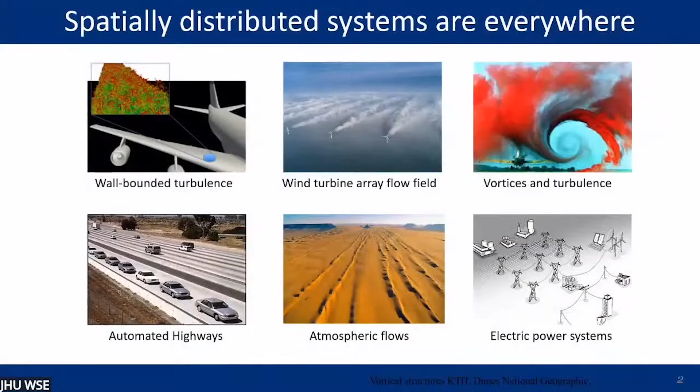You see it in electric power systems, automated highways, and you see it in terms of what patterns you see from atmospheric flows. And so systems that evolve over space and time, or these spatially distributed systems, are inherently complex, for a lot of different reasons.

But one of those reasons is they're often high dimensional. Because say you need a PDE representation, meaning you need math that goes in space and also goes in time. So you get a complicated dimensional system.

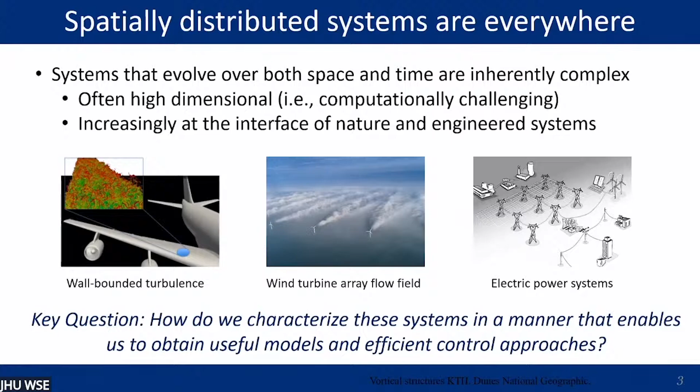And they increasingly happen at the interface of nature and engineered systems, where you have to deal with different uncertainties that are coming both from nature and from things that we're trying to deal with and control, such as wind farms. So the question is, how do we characterize these systems in a manner that enables us to obtain useful models of these systems, models that let us reason about what's happening, and also efficient control approaches?

So the goal of my lab is to really understand, characterize, and control these complex systems by exploiting structure. And that structure might be physics, it might be some of the spatial interconnections in these systems. I want to do that so I can develop reduced order models that isolate critical system properties, allowing me to reason about more complicated systems by looking at simple interactions. And I want to leverage this new understanding to design performance-enhancing control strategies or operational strategies.

And so I've worked on a lot of different systems. From John's introduction, it's all his fault that I work on all of these different things and that I want to work on all these different systems. So I come by it honestly. From wall-bounded turbulence that you see here, all the way to electric power grids.

But today I'm just going to focus on three problems. I'm going to talk about some of our key contributions in flows transitioning to turbulence, also in wall-bounded turbulence, fully developed turbulence, as well as in control of wind farms.

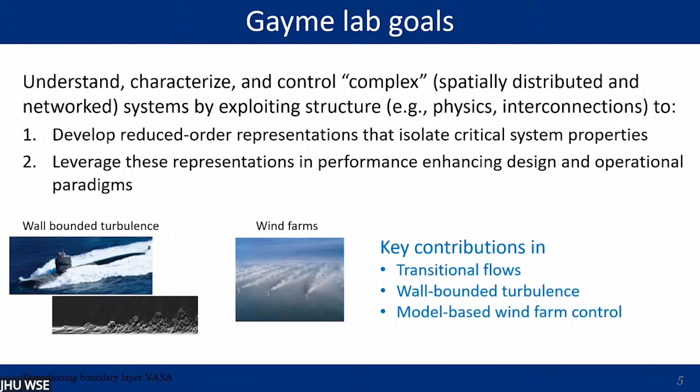And so I want to start, because many of the audience are not from a fluids community, with just flow over surfaces. So if you think about flow over surfaces, like over an aircraft wing, you have this airfoil, and you generally want this flow to be streamlined and laminar. That reduces form drag, which is why cars are designed in ways that look very streamlined. So you reduce form drag, and you can see that. This is flow over a boundary layer, and you can see this nice streamlined laminar flow here in this region.

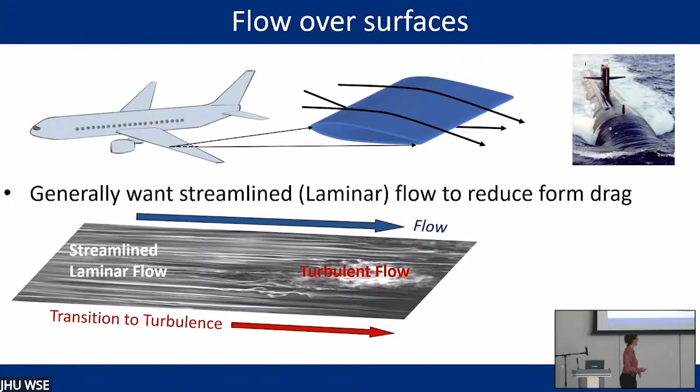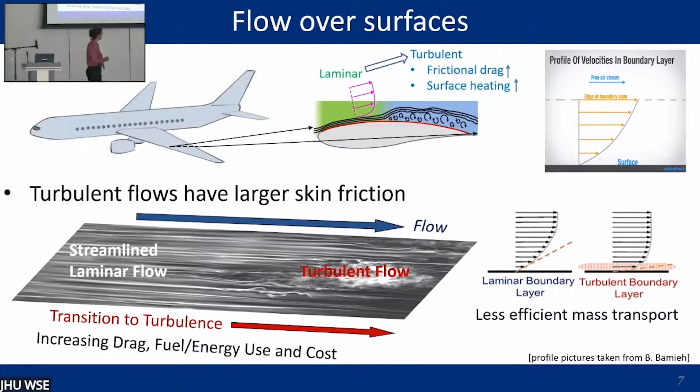But as it transitions to turbulence, you get a lot more mixing of this flow. It doesn't look so streamlined and laminar anymore. And what does that mean? It actually means that your flow is mixing up quite a bit, and it's interacting with the surface more. That's not good in terms of mass transport or efficiency of mass transport across this. So you get less efficient mass transport, and more skin friction drag, and you can get more surface heating.

So just to make this a little bit more concrete, let's look at an example. And so this is what we call a canonical flow.

So these are prototype flow problems that we look at and reason about so that we can understand more complicated systems. Think of flow between two infinite parallel plates, driven by the motion of the top plate - it's a shear-driven flow because you get a shear developing here. In a laminar system, you get this nice organized flow, and this is the shear that you get.

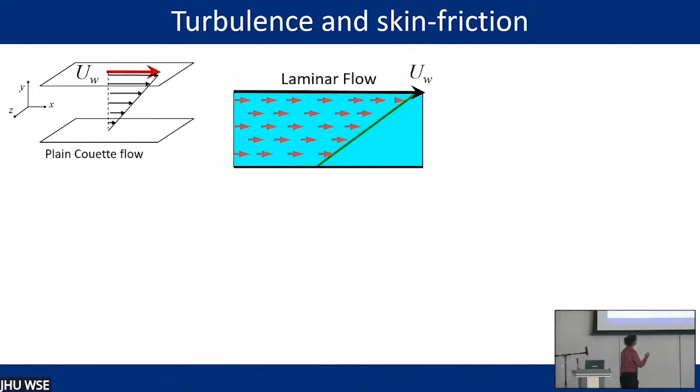In a turbulent flow, everything's mixed up quite a bit, and so the velocity profile that's coming out of this looks very different.

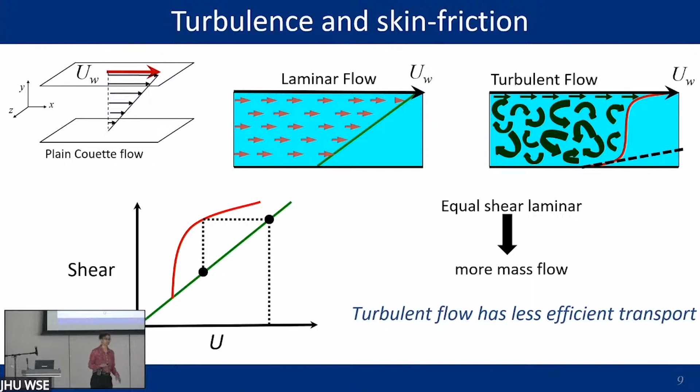If you look at the shear in the turbulent flow versus the laminar flow, for the same shear on both curves, you're going to get a much higher velocity in the laminar flow. This is what I mean by more efficient transport, because for the same amount of forcing, you're going to get much less velocity in a turbulent flow. So you have less efficient transport.

If we want to prevent this from happening, because we want more efficient transport in many applications, what we want to do is design some sort of control or model of what's happening in order to design strategies to mitigate this. So we want some sort of plant model. I'm a control theorist at heart, so I like block diagrams - I want this plant model that I can use to design a controller.

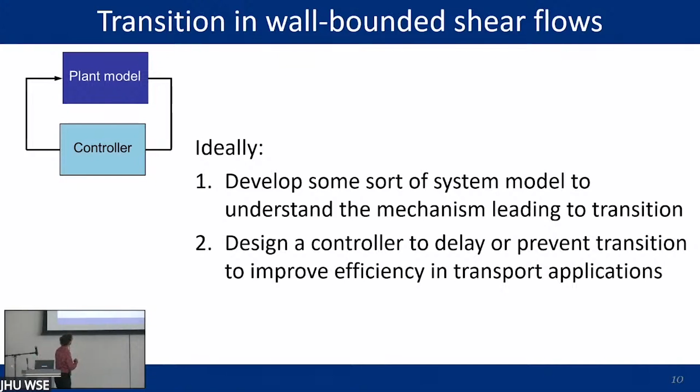But unfortunately, turbulence is really, really complicated. John doesn't think so, but in general, most people think turbulence is really, really complicated.

Okay, fair enough. So, oh, this is very interesting. Wow, this is going to be very interesting. There's not that much math in the talk, so we'll see how this goes.

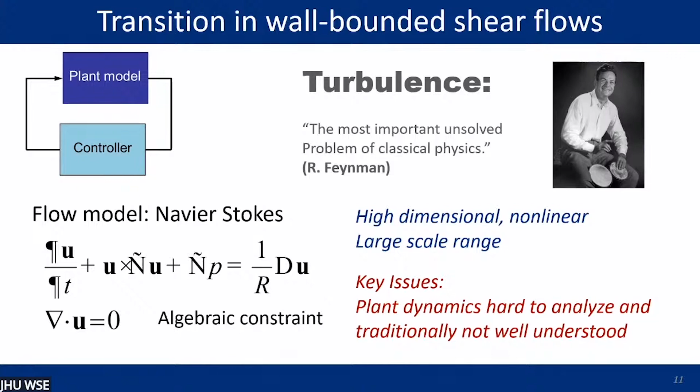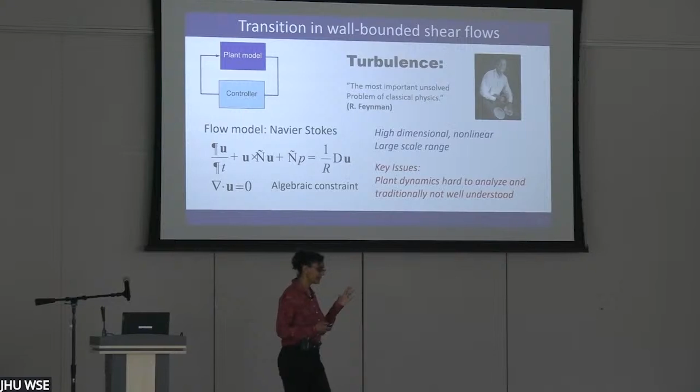So we have a flow model, but it's the Navier-Stokes equations, and these models are high dimensional. There's a large range of scales - very small scales close to the surfaces, and very large scales. This makes it very high dimensional, and very difficult to simulate or even do experiments. So these plant dynamics in my control block diagram are kind of hard to analyze.

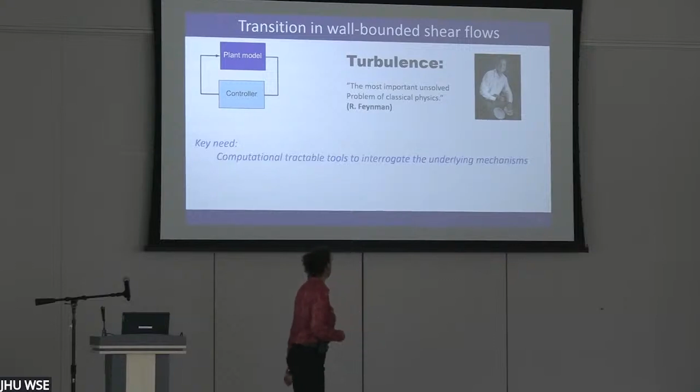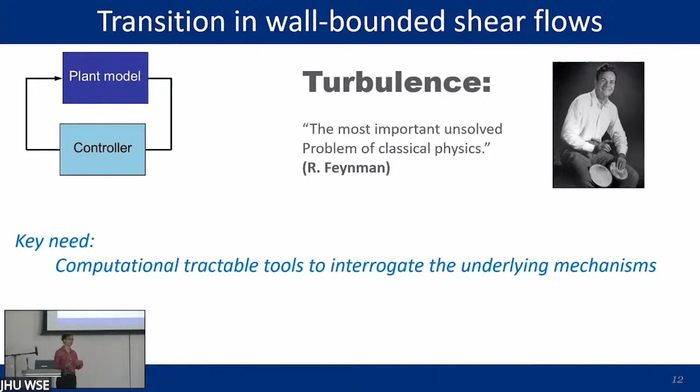And not traditionally super well understood in the context of designing flow control. So there's a key need to develop computationally tractable tools to interrogate what's happening there, in order to think about developing new models and new ways to control these types of systems.

That leads me to the first part of our contributions, which is really in transitional flows - flows as they're moving into the turbulent regime. What we've done is try to improve the fidelity of some tools for efficient analysis, using these tools to understand what types of actuation may be beneficial in delaying turbulence and transition. There's been a lot of work in this area.

One of my colleagues, Tamer Zaki, is an expert in this area, and this is actually a simulation of his. You can see this transition - we've had a lot of great progress from these simulations in understanding transition and turbulent flows.

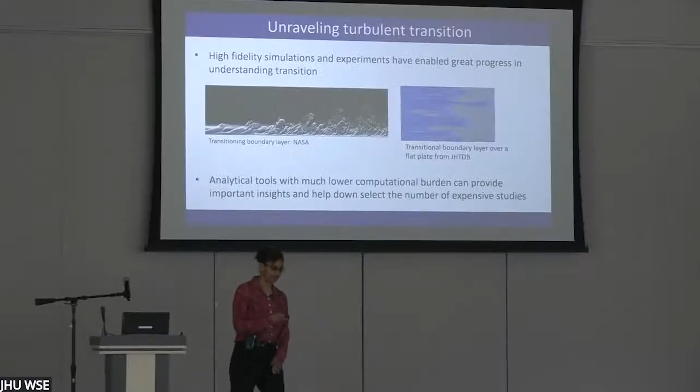But it's really expensive to do these types of experiments. So this is an experimental transition to turbulence where you can see, again, ordered behavior turns into very disordered looking behavior as you move along.

So what we want to do is design tools that have a much lower computational burden or are much more analytically tractable, so that we can reduce the number of these very expensive studies like simulations and experiments, and really understand which regimes we want to study.

One thing that's proven very beneficial in this regime is just linearizing things. If you don't want to think about this in mathematical terms, it means throwing away all the difficult terms in the equation - we can just think of nonlinear terms as difficult terms, so we can get rid of those.

It turns out that if you just think about this in terms of disturbances to the flow - which could be the things we threw away - this linearized model gives resulting velocity fields that look really similar to reality. There's been a lot of progress here. This is looking at what's called an impulse response, where you hit the flow really hard to see what happens.

And so what you see is, what you get from these linearized models is something that looks like this, which looks very much like a turbulent spot that you see in the field. You also get these high and low speed fluid streaks, which is what you're also seeing in these transitional regimes.

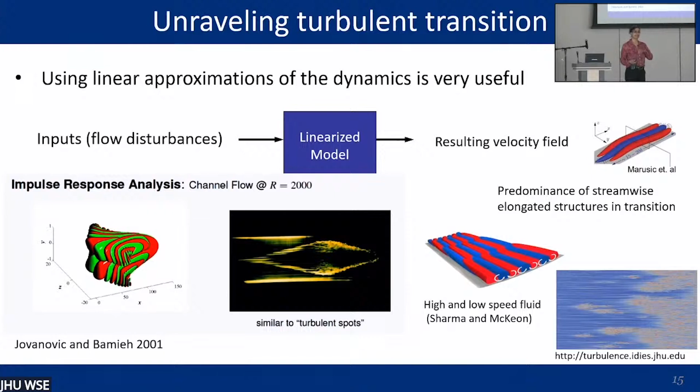So this gives you a lot of information about what's important and what types of disturbances are likely to make your flow transition. So the key insight that we had in my group, really from my student Chang Liu, is that we can do better than just a linear approximation by imposing some structure on this nonlinearity, including it in the model without greatly adding to the computational burden.

So what we actually did is we took this nonlinearity that looks like this, and we approximated it using a static gain operator. We keep the structure here of this nonlinearity, so we just have the same input-output mapping. This direction only goes to U, this direction only goes to V and W. And so we use this as an input-output gain idea.

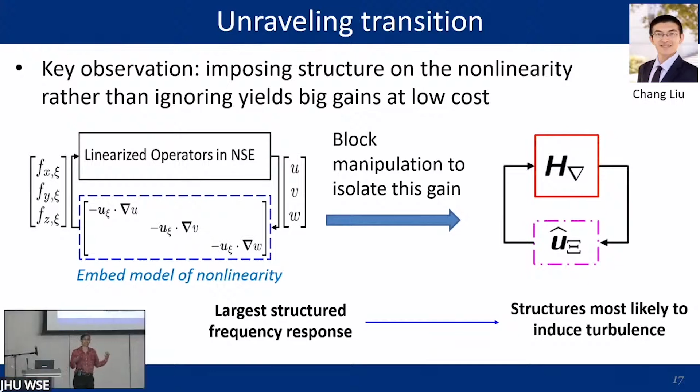And so then we can take this nonlinear operator, do some manipulations of this block, and put it in what looks very much like a robust control formulation. Then we can solve for this static gain as the disturbance that is most amplified here, so the structured singular value, if you will. The largest structured frequency response of this interconnected system gives us the structures that are most likely to induce transition or turbulence.

And so where we've applied this is really trying to understand the disturbances that the flow is most sensitive to. This is useful, say, if you want to design an experiment and you're trying to trigger transition in your experiment, you want the transition to happen as fast as possible. You can reduce your experimental size. Even in a simulation, you want to be able to trigger transition in the most efficient way, so this might be something that you want to do.

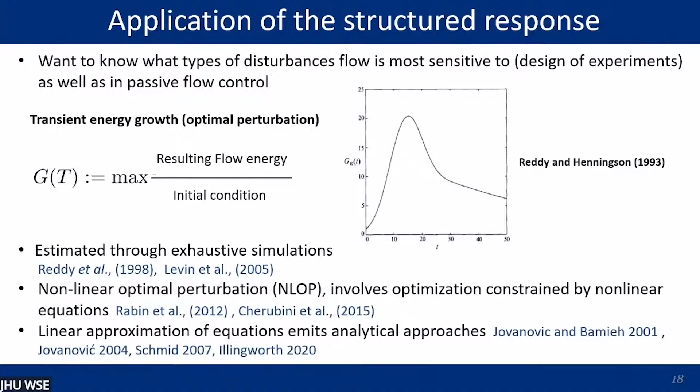And so what you want to do then is figure out what initial conditions are going to cause the greatest energy in your flow, right? So this is kind of an input-output response. You can do this in a lot of ways. People have done exhaustive simulations where they put in all sorts of initial conditions and keep testing and testing to see which ones the flow is most sensitive to. As you can imagine, that's quite expensive.

You can do optimization with the nonlinear equations, and it turns out you can use the linear equations to do this. This allows us to do things with input-output gains or norms, input-output norms. So you can use analytical approaches with the linear equations.

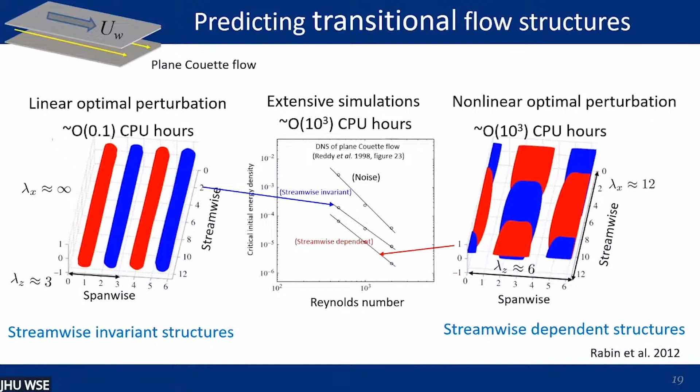But the problem is with the linear equations—again, we're going to look at this plane Couette flow example I talked about before. With the linear equations, you can do this really fast, almost 0 CPU hours. You can do this on your laptop really easily. You get structures that look like this. So this is span-wise and this is stream-wise, with stream-wise going in this direction.

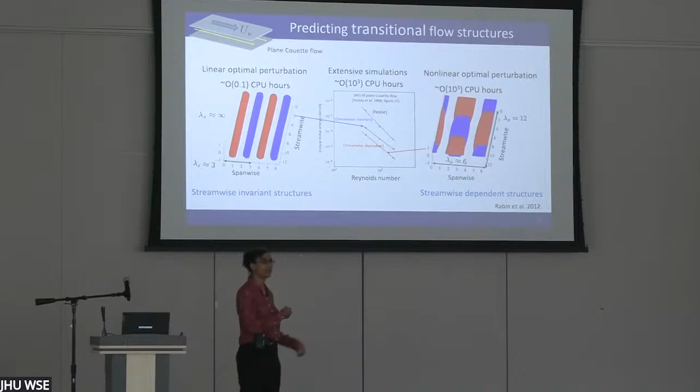So these structures look like this, right? These are long roll-like structures. But it turns out if you actually do exhaustive simulations or look at a nonlinear optimization problem, the structures look slightly different. They are shorter—these are infinitely long in extent, but these are more like oblique waves, and they're fatter.

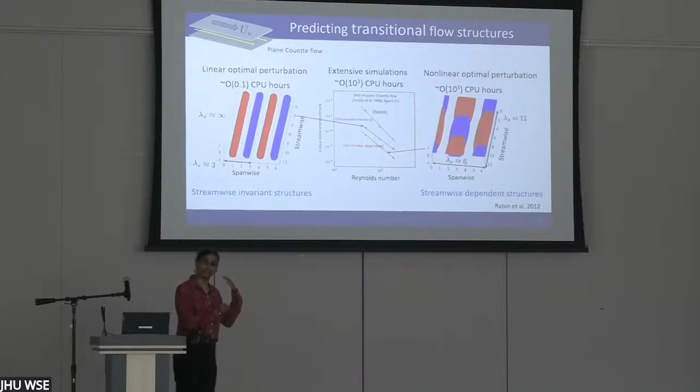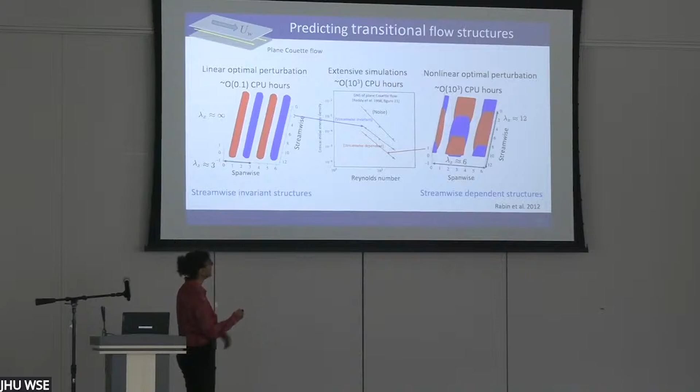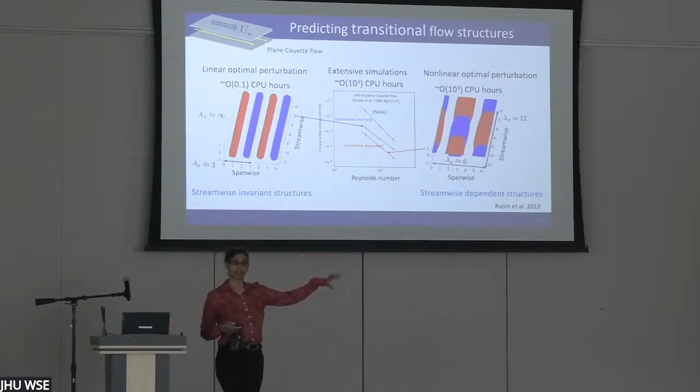And so if you do exhaustive simulations, they present this data in a slightly different way. But what you're looking at here are the structures that require the least energy density to transition—meaning the ones at the bottom are the ones the flow is most sensitive to. So these streamwise dependent structures correspond to the same things you get from this nonlinear optimization, whereas these streamwise invariant structures, these infinitely long structures, require a little bit more energy. So what we're seeing is these nonlinear approaches give us different answers than our linear approaches, even though we get the insight from it.

And so you can look at it again through looking at this exhaustive DNS, and you can see again we're getting the correct ordering of the structures, where the white noise also can trigger transition, but with more energy.

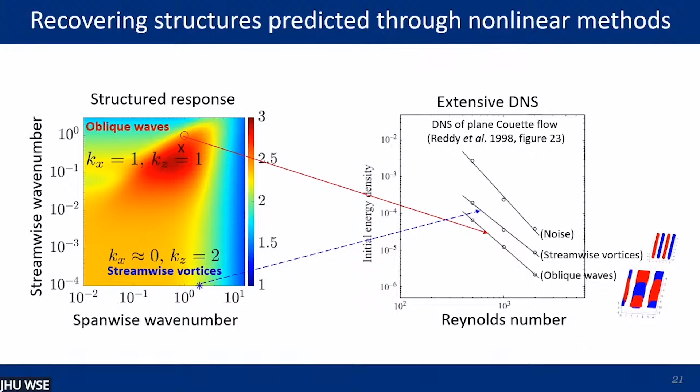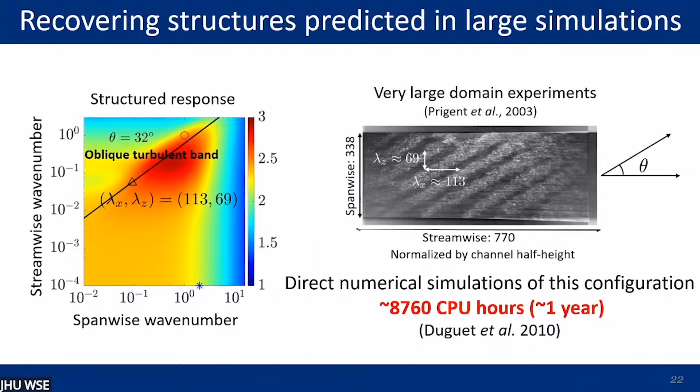The other thing that's nice about this type of approach is we also can reproduce the structures you see in transitional flows and structures you can only see if you use really, really big channels. So this channel is 338 by 770 times the height of the channel. So when I said infinitely long plates, those are really, really long plates, right? So you need to do a simulation this big.

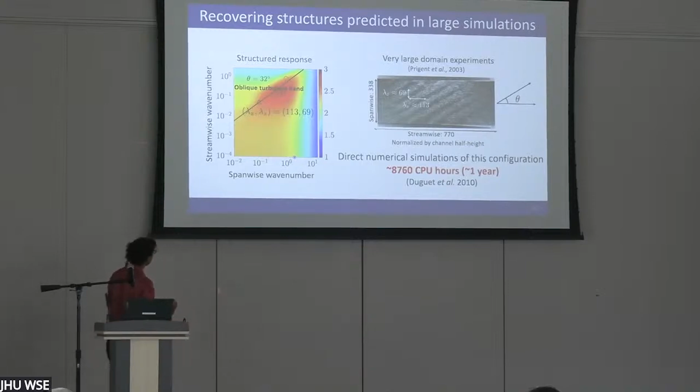So apparently that would take about one year to do a DNS, a direct numerical simulation of a channel. And we can do this in probably about an hour on a laptop. And we can identify the angle of these structures that they see in the flow here. So we're reproducing some of the structural features as well.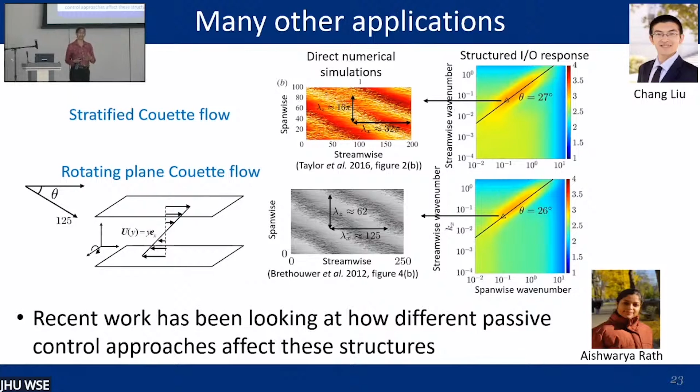And we're sort of moving into thinking about this for more realistic flows like boundary layers, and looking at the effect of different actuation in boundary layers.

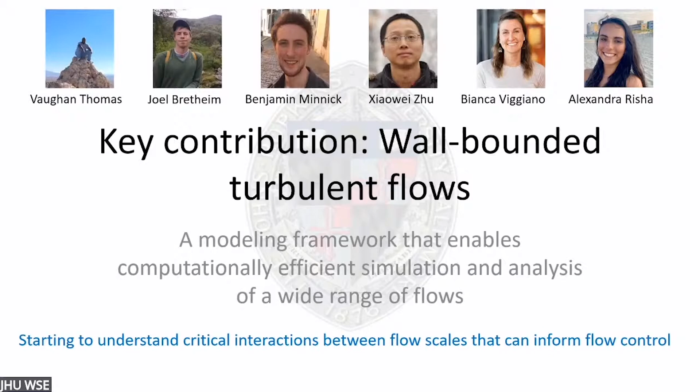So I'm going to move on to the next contribution, which is in fully developed flows. Now we've gotten to the regime where we're completely disordered, in this turbulent regime. Here our real contribution has been, again, a modeling framework that enables computationally efficient simulation and analysis of a wide range of flows. And in this work, we're really trying to understand some of the critical interactions between different flow scales that we can use to inform different flow control strategies.

So again, I like to use the simplification. I use the linearity to simplify the structure of the problem through the structure of the nonlinearity in the transition problem. But here we're actually just looking at the flow field and trying to look at structures that people see are ubiquitous in the flow field.

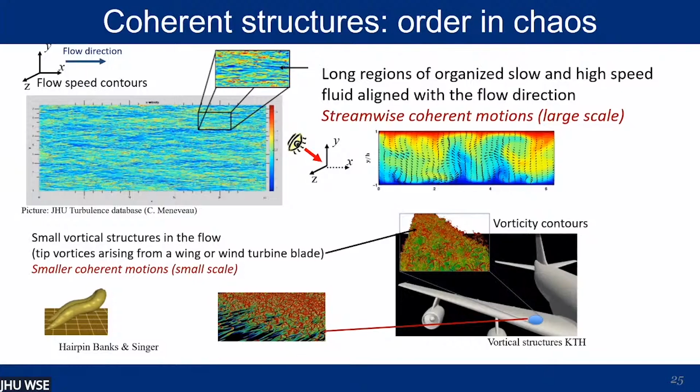And so it turns out, this is a picture from the Johns Hopkins Turbulence Database. You can see it's very clear there are these sort of long, streaky structures like I was talking about before in that flow. So if you look head on to this flow, this is the streamwise direction. So if you look this way, these structures look like this, and you can see these vortical structures here.

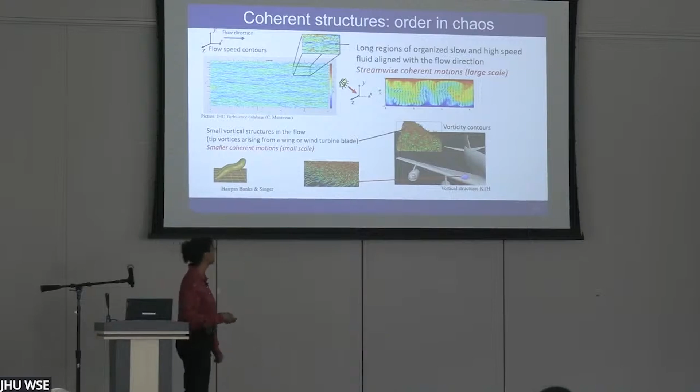You have smaller coherent structures in the flow, like these hairpin vortices, which you actually also see on these aircraft wings, where we're just highlighting the contours of vorticity. So you see there's a lot of these coherent motions. And there's been a long history of coherent structures in wall turbulence, trying to understand these coherent structures and building mechanistic models with them.

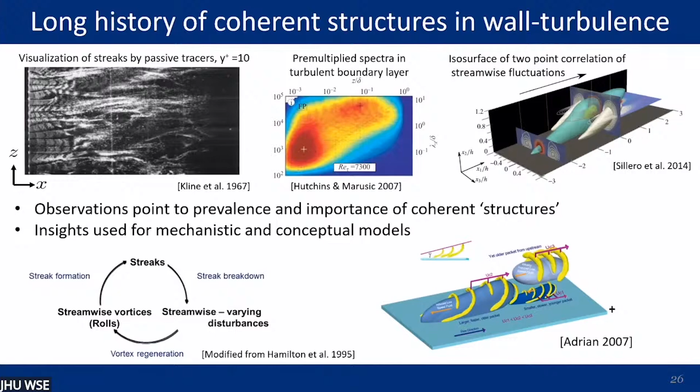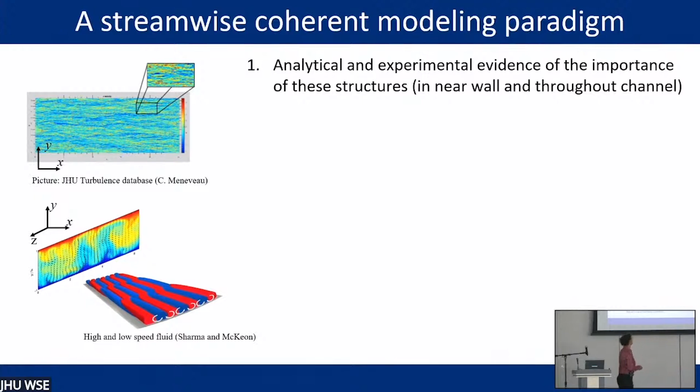What we're going to do is really focus on the particular types of structure I pointed out here, these sort of long, streaky structures, or as Jan would say, the ones that go like this. And there's a lot of analytical, as I said, and experimental importance of this.

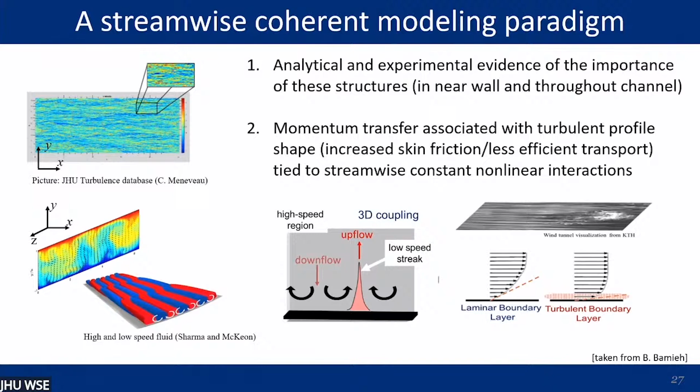It also turns out that the momentum transfer associated with that change in the velocity profile from sort of this laminar profile, where you have a different angle at the wall associated with the lesser shear. You have a greater angle at the wall here, and the skin friction drag is related to this flow mixing.

And so this flow mixing is well captured by these rolls, because as you can imagine, these vortices lift up this low-speed fluid near the wall that's not moving, say in a Couette flow, and you bring down the high-speed fluid. So that's the mixing mechanism that you get here, and you capture that with these streamwise constant vortices as the large scale in your flow.

So what we do is we assume that all of the large scales and the mean flow behavior is streamwise constant. And so we think about the flow, we take the Navier-Stokes equations, we decompose it so that that's the mean and the large scale, and then we design perturbation dynamics that we simplify, we linearize them in order to look at small scales. So we divide our flow into this large scale, which are these streamwise vortices, and these small scales.

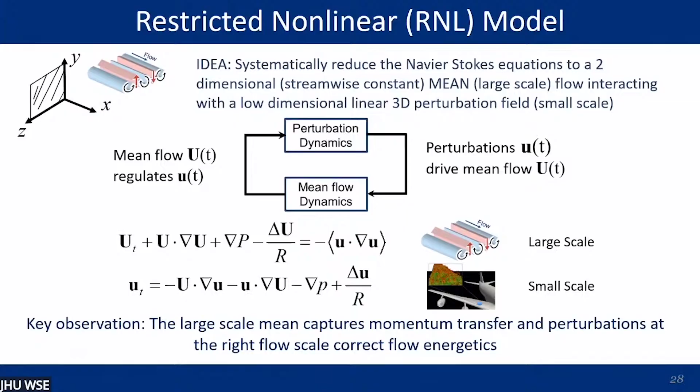What we're really doing is assuming the flow is quasi-2D, reducing the Navier-Stokes equations into a two-dimensional streamwise constant large scale that's interacting with a linearized small scale perturbation field. Our key observation is that this large scale structure captures the mean momentum transfer, and if you put in perturbations at the right flow scales, you can get the correct statistics and energetics of what's happening in the flow.

So here are some example results from this work. We have a much simpler model. I want to point out that simulating this model was about 20 times faster than a direct numerical simulation. If you look at the statistics—this is the mean, and these are the second order statistics—we match very well.

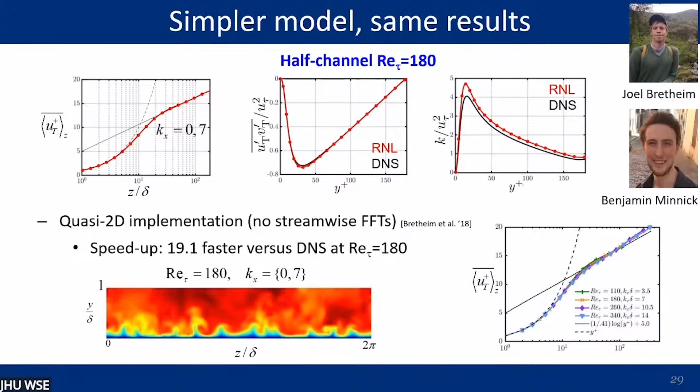We actually have a quasi-2D flow that only has one dimension in the streamwise direction, so we can solve everything in a two-dimensional instead of a three-dimensional domain, and that's why we get the speedup. The flow looks quite similar to a real flow, and this is just one example at one Reynolds number, but it's true across a range of Reynolds numbers.

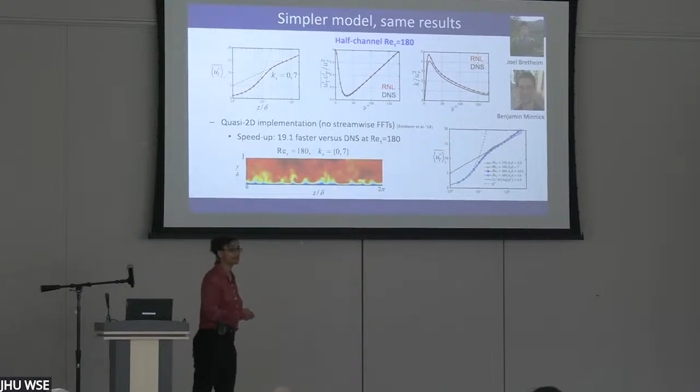We wanted to apply this model to more complicated flows, so we looked at flow over rough surfaces. One reason this is interesting is that riblets on these surfaces are a passive form of flow control—people have heard a lot about shark skin making things aerodynamic for swimmers, and there was controversy about swimsuits with this kind of aerodynamics. So this is riblet type flow.

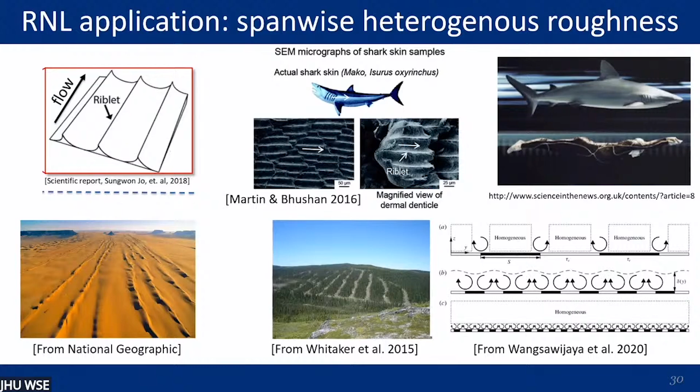You get vortical structures forming with the riblets, and you also see these types of structures in nature. We looked at this from the perspective of a very high Reynolds number, like an atmospheric type flow, using a large eddy simulation to reduce the model complexity. We looked at a surface with patches of high and low roughness to model something like this, again using a really low dimensional, almost 2D model.

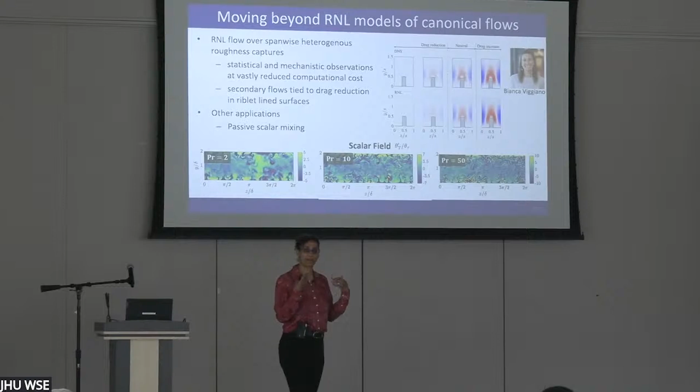We can also capture that in more detail. This is a lower Reynolds number case looking at blade type riblets over a range of riblet spacings. These spacings are associated with drag reduction, and as we start losing some of that drag reduction, you can see we're capturing the differences in vertical velocity around these riblets with this type of simulation.

We've also applied this to passive scalar mixing, and you can see we get a really complex looking field even with this very low dimensional model.

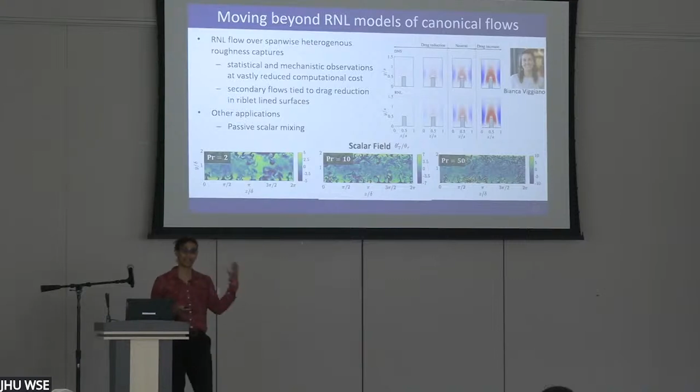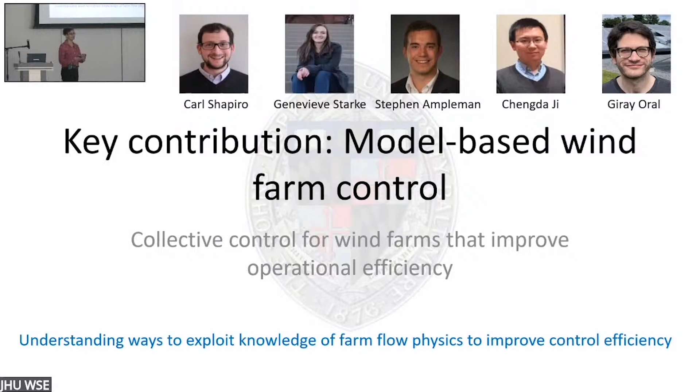The final thing I want to talk about is model-based wind farm control. I think our key contribution here is showing that you can improve operational efficiency by doing collective control—meaning control of the flow physics you see in the interactions between wind turbines. Wind turbines are very complicated because when you arrange them into farms, you get wakes.

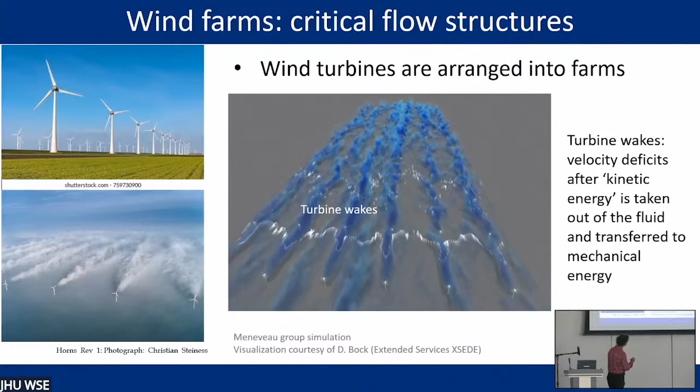You can actually see the low speed velocity in the particles that are seeded here. You can really see the velocity get lower. And then you can see all of the mixing that happens.

In fact, what really happens is as you have this wind coming in, you have turbulence in the atmosphere. It comes into the turbines. You lose energy, you get this wake region, this lower velocity region, and then continuous mixing with the turbulent atmospheric boundary layer is what regenerates the kinetic energy in here.

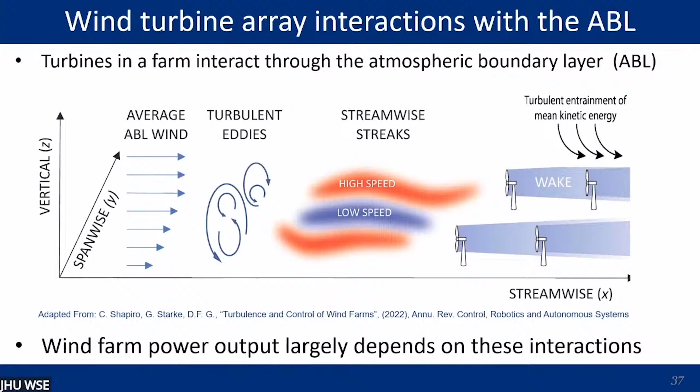And so if we want to do wind farm control, we really need to account for what's important in the wind farm. In this case, the structure I really care about in controlling power output in a wind farm is the wakes, because that's going to tell me what the velocity at the hub height is.

And that's going to tell me how much power I'm actually going to get out of my turbine. So I want to look at a particular control application, because, as John said, I like to connect some of these things to the power grid. What I want to look at is secondary frequency regulation, which is when you need to track a power signal.

You need to track a power signal in secondary frequency regulation because the grid frequency, the 60 hertz you see on all your plugs and everything, that's associated with keeping a supply and demand balance on the power grid.

When you lose that, in order to regain it, because at least historically all of the machines were synchronous and they were still all spinning at 60 hertz, you actually need to track a signal as these machines start spinning faster and slower to get back up to running all at the same frequency. So that's why I'm tracking a power signal to do frequency control.

What you need to do frequency control, typically what you do is, in order to track this power signal, you divide your signal into some sort of scheduled bulk power and then some sort of regulation on top of that. This type of secondary frequency regulation to get the grid back to synchrony takes somewhere between 30 seconds to tens of minutes.

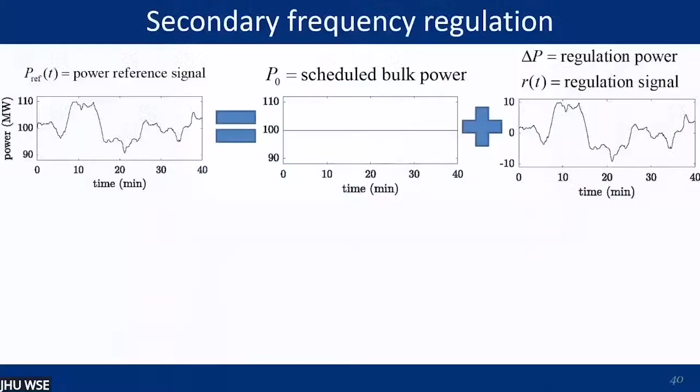One of the things that's challenging here in terms of a wind farm is that you need to be able to up ramp. So it means you can't be taking the maximum amount of power or maximum kinetic energy out of the wind the whole time, or you won't have the actuation authority to up ramp at a given time. So you need to actually reduce your bulk power supply in order to be able to do this up ramping.

You take that and you reduce it by some amount alpha. We call that a derate in terms of the wind turbine. So you derate by some percentage, and ideally, you want to be able to up ramp by more than you have to derate. With a single turbine, they have to be equal. You can play some tricks with kinetic energy in the rotors and stuff, but I'm not going to talk about any of that. So they would have to be equal.

But it turns out in a wind farm, there's a direct economic trade-off here. In any case, in a wind farm, you can actually take advantage of the fact that these wind turbines are really, really far apart. So it takes time for the air to travel from one turbine to the next. You can store kinetic energy by taking energy out later in the farm and not taking it out earlier.

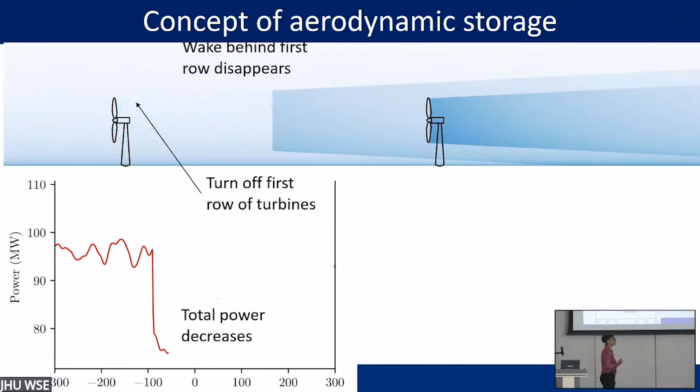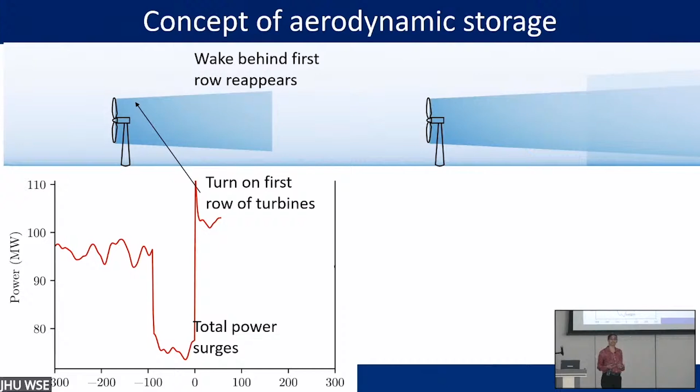So here's an example of that. If you have two turbines, and this one's in the wake of this one, you have some steady state power output. If I turn off the first row of turbines, obviously I lose a lot of power right away. But at a certain point, the second turbine's no longer waked. So if I turn this one back on, for some period of time, I now actually have more power than I did before, because both of them are unwaked.

And then, of course, in time, it goes back. But you can take advantage of this aerodynamic storage, particularly in really large farms where the inter-turbine travel time can be quite a bit. So if you take, say, a 200-meter diameter turbine that is 7 diameters apart, two turbines are 7 diameters apart, you're talking about 140 seconds for travel time from one turbine to the next.

So if you think of a 10-row farm, you're talking about 24 minutes. And so really, you have about 24 minutes from when your wind hits the front of your farm to when it gets to the back. And that allows you to participate in things like frequency markets that have these 30 seconds to tens of minutes in terms of power tracking signals.

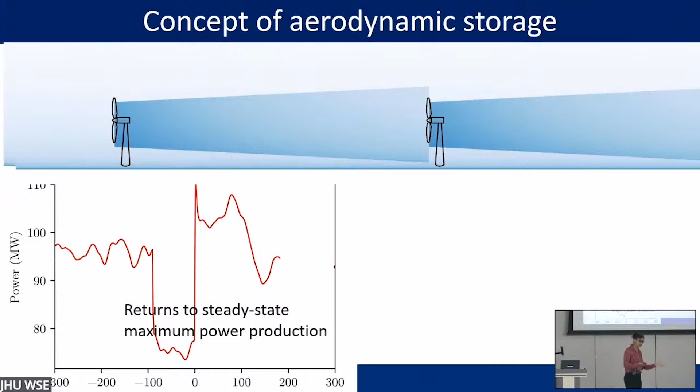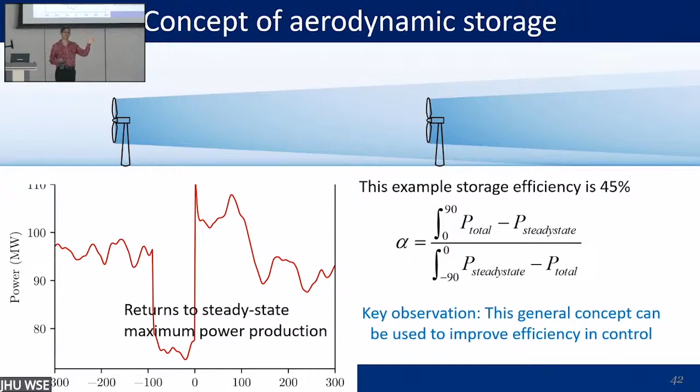So the key observation here is that we can improve control efficiency by taking advantage of that. And when I say improve control efficiency, what I mean is I don't have to derate by as much as I want to up ramp.

So the way we do this is we start with a model. In our particular model, we want to model the advection of the wake from one turbine to the other. I'm looking at a very simple model here, modeling the farm as a collection of columns one after the other. I can model this wake propagation as a linear advection diffusion problem and assume that whatever the incoming velocity field is, that's the speed the wakes travel through the farm. This is a simplifying assumption.

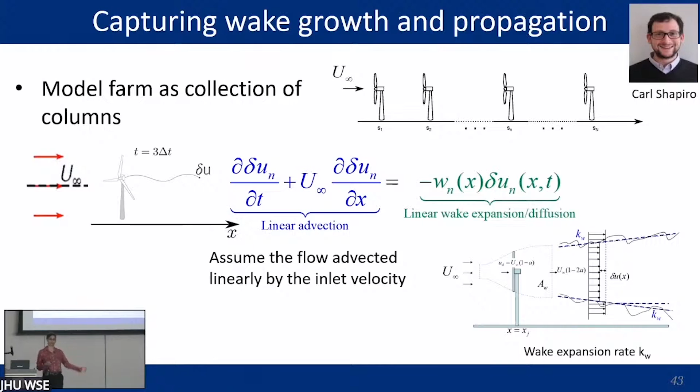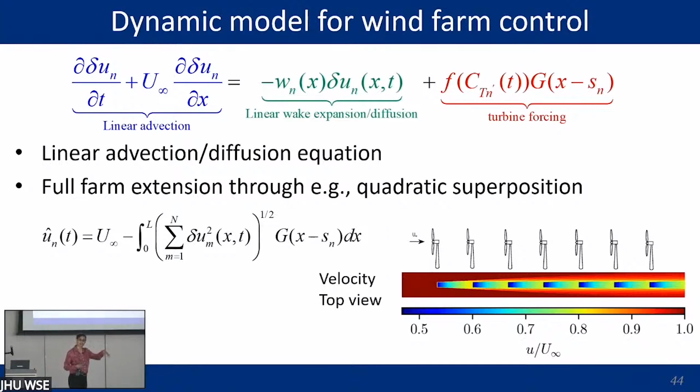And then I can use some sort of superposition. Here I'm assuming that kinetic energy adds linearly, so I do a squared superposition of the wakes in order to figure out what the velocity at each part of the farm is.

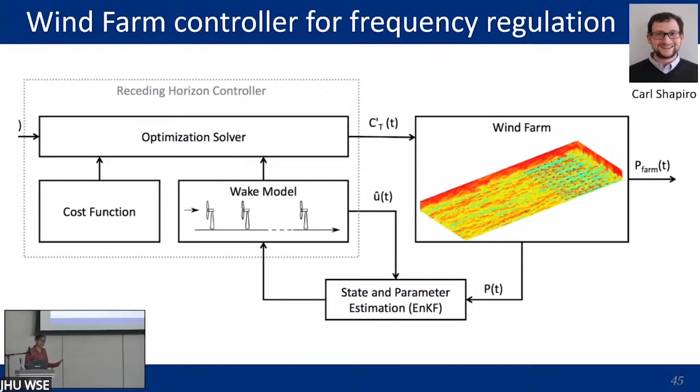And so we can take this type of model and put it in a control framework. Here what I'm doing is I'm going to control a large eddy simulation, like the one I showed you earlier where the wakes were depicted in blue, using this type of model where I take into account the travel time, the propagation.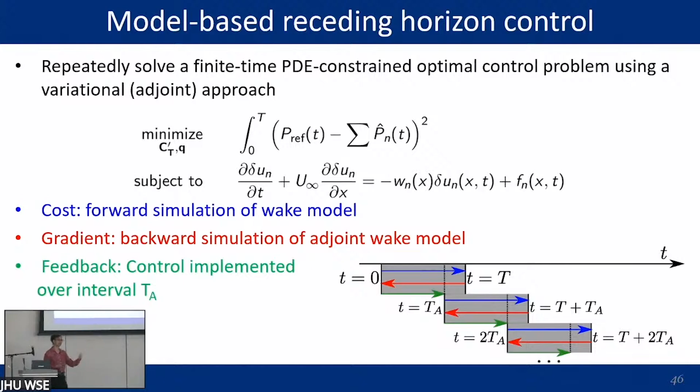And so what we do here is we're using receding horizon control. That just means we're minimizing the square difference between the signal we want to track and the power output of the farm, with a constraint of this wake model. We solve the problem for some period of time, then look at what's happening in the farm and recompute. This model predictive control allows us to do a feedback loop by measuring what we're doing.

We're going to implement this in a large eddy simulation, and we're also going to do some estimation to do feedback. So what we're going to use is an ensemble Kalman filter, and there's a lot of math here. But what we're really doing is taking our model and running it over and over again to get the statistics of what's going on.

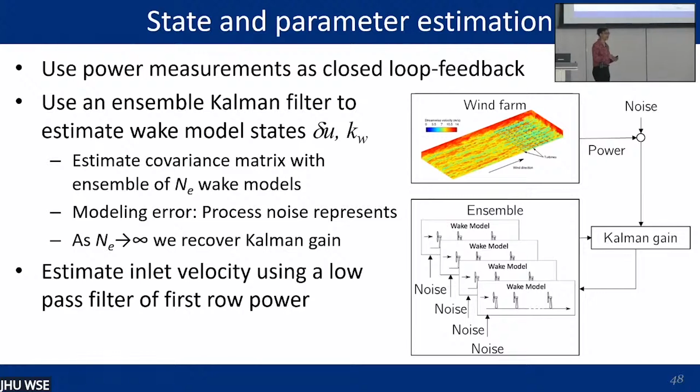And then we use the statistics of the model because it is a partial differential equation. It's very high dimensional, so we can't actually solve what's going on exactly. We find the statistics over some number of realizations, and we use the statistics of the model behavior in order to estimate what is happening in the actual wind farm.

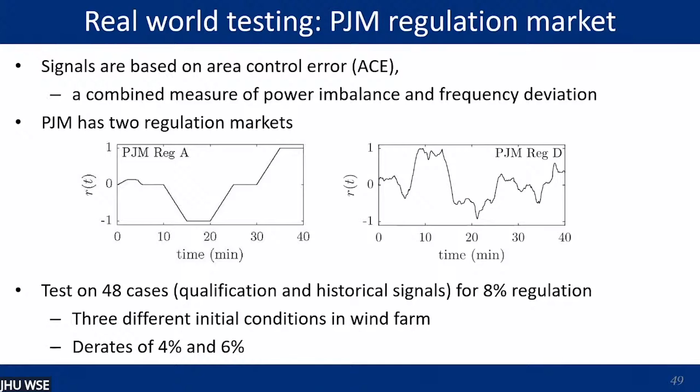So we put that all together, and I want to show you that this actually works. We tested this type of control on the PJM regulation market, which is a power market that operates in this region. They have two types of secondary frequency regulation: a Reg A, where your signals are kind of smooth, and a Reg D market. They're based essentially on the power imbalance at a given period of time.

So we tested this on 48 different cases, qualification cases, because you have to qualify to participate in these markets, as well as historical signals. We looked at 3 different wind farm initial conditions, and derates of 4% and 6%, to achieve power regulation of 8%.

They measure this based on accuracy, delay, precision, and a composite score. With 4 and 6% in both of these markets, we actually always pass. We do a lot better in the Reg D market, largely because of the way we designed the control—that market, everything integrates, all the signals integrate to 0, and the type of control we're using does better with things that integrate to 0. But we actually do quite well in the other market too, just differently in different types of scores.

But overall, this means that we can control more efficiently. So what that means is if we have to only derate by 4% rather than 8%, it means that 4% can be sold in the bulk power market. So if you're a wind farm operator, that means you're not losing as much money to participate in a regulation market. That's really important in terms of efficiency and making this type of control something you might want to do.

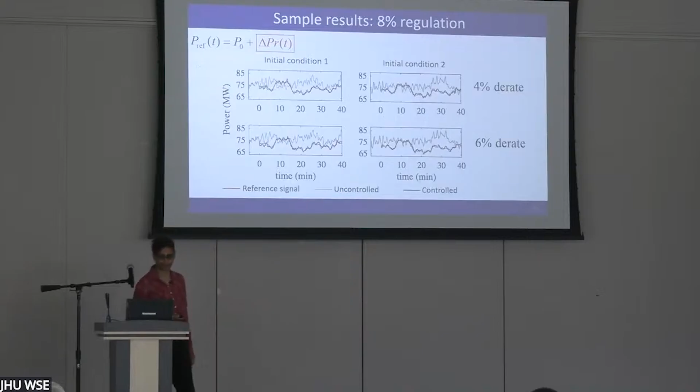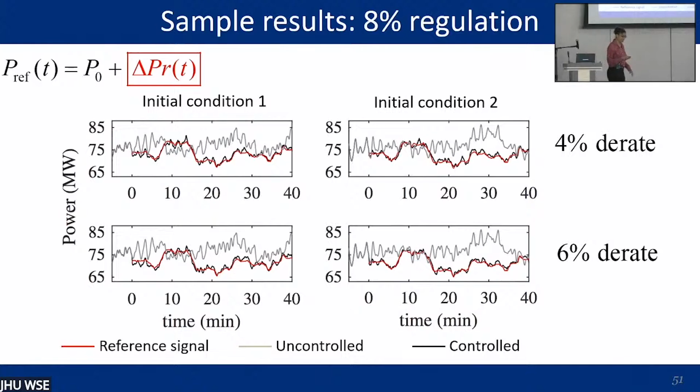So this is just some sample results to show you what would happen in gray in the wind farm if we didn't do any control, and to show our power tracking under 2 different initial conditions with 2 different derates. I'm obviously showing the Reg D, which works a lot better than the Reg A, but I'm also showing here some Reg A results.

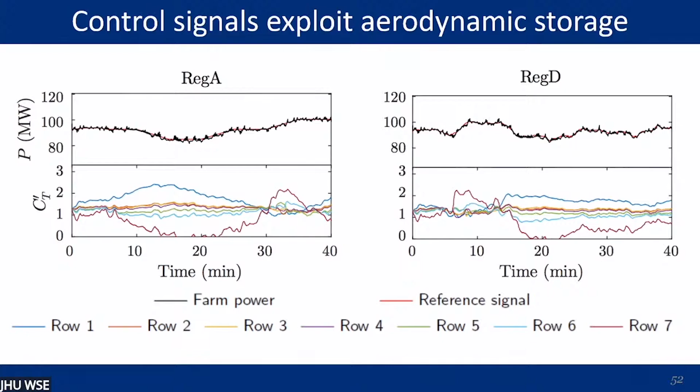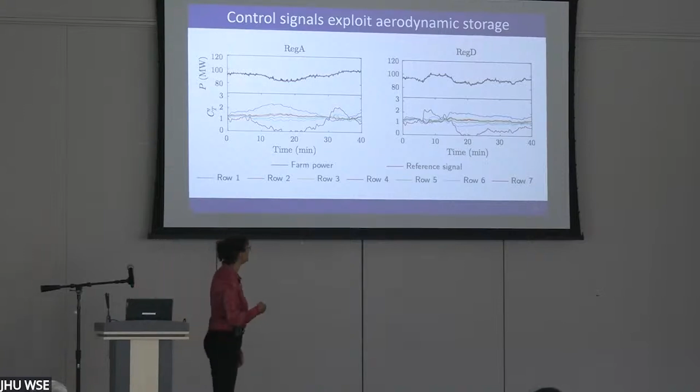If you look at row 1, what's happening is row 1 is taking more power here, but it starts taking less and less power, whereas more and more power is then available at the back to do this up-ramping later in the control signal. Similar things happen where the back row and the second row from the back are doing a lot of the control in order to do that up-ramping. So we really are taking advantage of storing kinetic energy a little bit longer in that flow field so it can be extracted later.

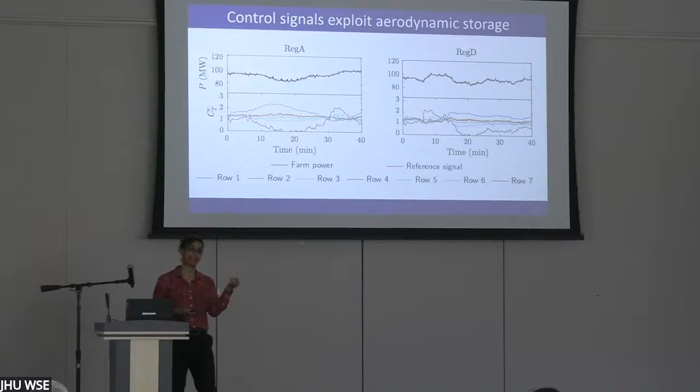As I said, these dynamic models accounting for wake propagation and the flow physics can really improve efficiency in wind farm control. It also enables us to participate in these new operational paradigms. Prior to when we first started this work, no one was thinking about using wind farms for frequency control, because the idea was we just wanted to maximize power output all the time, since wind was not a huge player in the energy system.

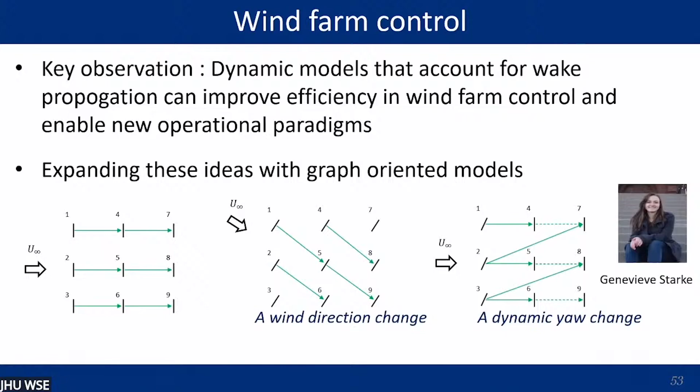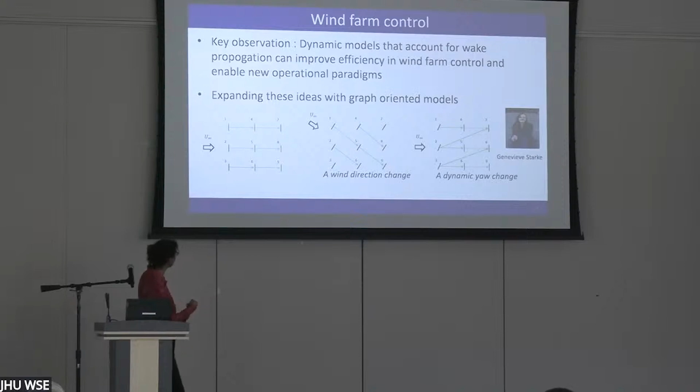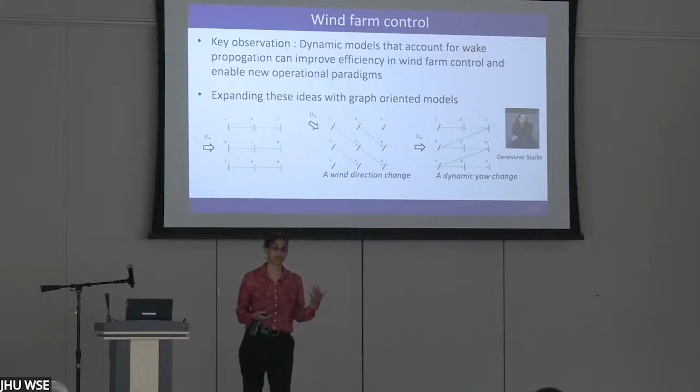But as it grows to a larger player in the energy system, having these new control paradigms is becoming increasingly important. So we're expanding this idea of using the structure in the wind farm by using graphs, so we can account for dynamic changes in things like wind direction. If our graph looks like this with this wind direction, your graph changes when the wind direction changes, and also changes if you do dynamic yaw, and we can design controllers to account for those things using graph-oriented models that take into account wake propagation.

As I said, I really am interested in understanding, characterizing, and controlling complex systems by exploiting structure. I've highlighted three examples where we try to develop reduced order models that isolate critical interactions in these types of systems, and showed you how we start leveraging this new knowledge from modeling to do performance enhancing control.

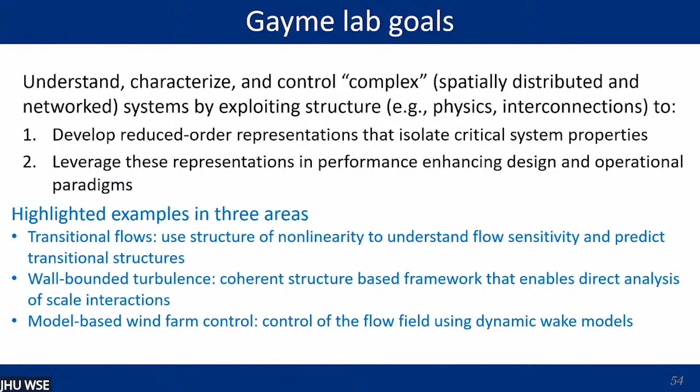With that, I'd just like to thank a bunch of people. I had the greatest set of PhD advisors. Between John and Beverly, I really had the dream team. I had someone who was incredibly creative and kind of crazy, like me — my students are saying, like you — and I also had somebody who was extremely disciplined and brilliant, who helped me stay on track, in Beverly. The two of them together was just amazing, and a privilege, especially to be one of Beverly's first PhD students.